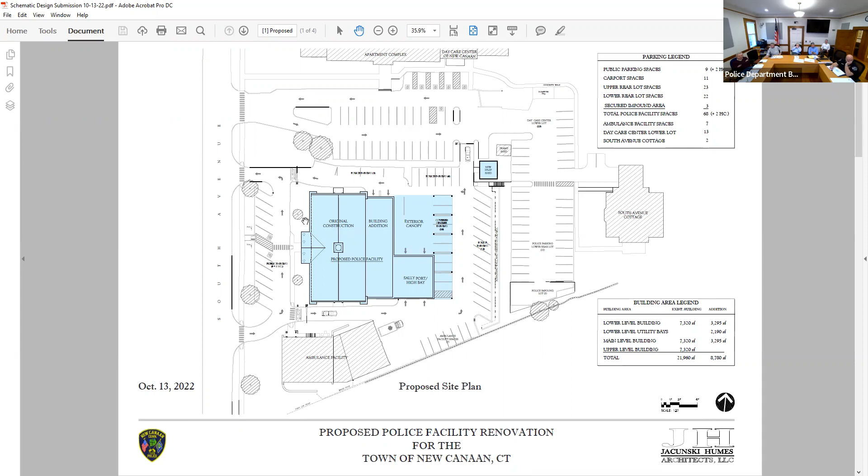I think we understand the visual of it, and we're going to work to minimize it. So Brian, if you lower it, does it create any risk with water infiltration? Because you'd want it most when we might have a water event. No, we can still I guess that would just be the area.

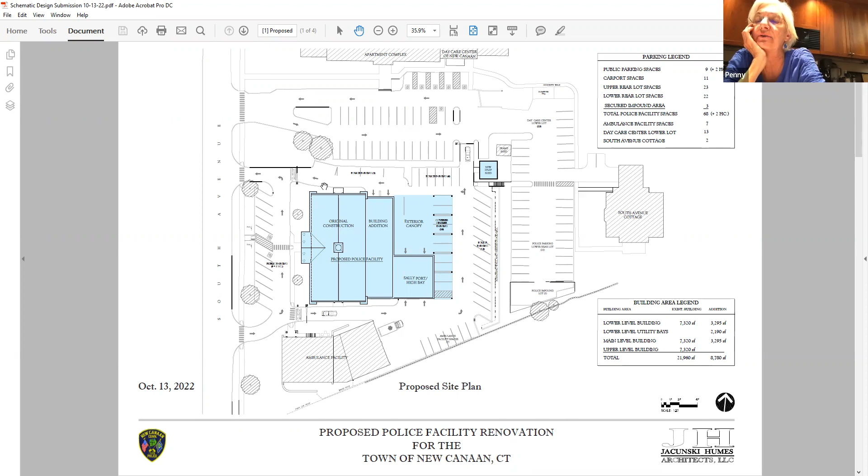Say if it's possible to rotate it around the building, no matter how nice you can make it look in the front, I'd like to know how much more it would cost us to do that, or if it's even possible. Now, the other location would be in this new island.

And that, we couldn't lower it at that location. We could just screen it. But lowering it here, as the grade drops around the corner, we wouldn't have a problem with drainage to pick up drainage from that.

So noted. My concern is with security of it, and that it's just sitting out there in the wide open. That's all.

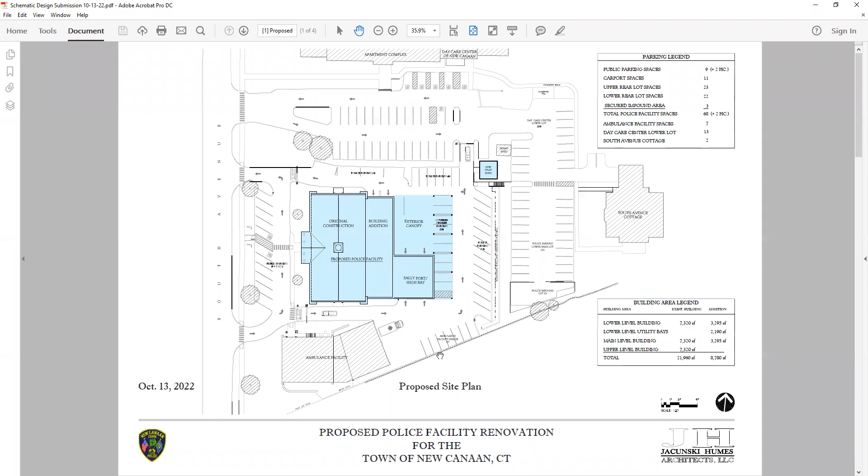As far as square footage, the chart on the lower right is the square footage compared to what we're at now. The only number that's changed is the 2190 for the utility bays. The earlier plans had that at about 1900, so there's a couple hundred square feet difference. That's the only change, and I don't see that as a real budget differential. A couple hundred square feet on a bay - those bays are not your high dollar per square foot areas.

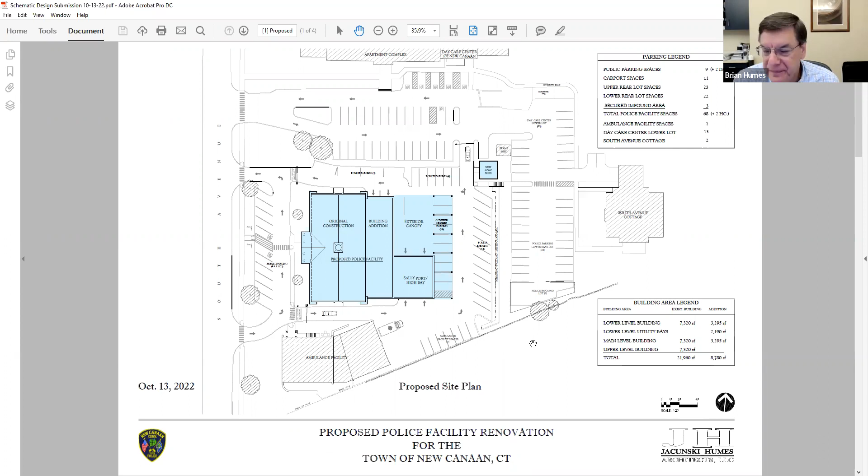So we've reduced the number of spaces in the carport, but the area of the carport is pretty much the same. We'll jump into the lower level now.

Why don't we start at that same Sallyport utility bay arrangement? That's where we've gained a couple hundred square feet, but we've actually made these double deep for 2 vehicle depth. The last one we had was 3 bays wide, all single depth, so we could accommodate 3 vehicles or bays of that size. Now we can accommodate up to 4 vehicles. And we've labeled these as utility bays, but in essence, they could all be a Sallyport.

We have wire mesh separating left and right, and a security screen at this location separating north and south. So it gives the police department flexibility on whether they want to store something in a bay, use one as a drive-in back-out bay and secure it for a forensics hold, or maintain 2 bays as a Sallyport.

What the police department's benefit is to a double deep Sallyport is not just that you can put 2 vehicles in there at once, but you can put a longer vehicle or an ambulance into that bay and have the distance to pull the stretcher off the back. A lot of times transport may involve medical transport, so having the capability of bringing a longer vehicle or ambulance in, getting the stretcher out the back, and then transporting is a benefit over a single deep Sallyport.

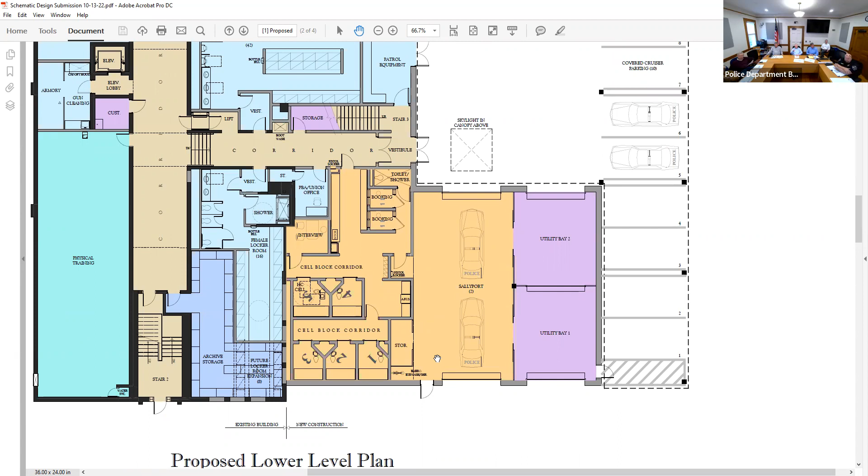So the maintenance vehicle space is where the emergency generator could go. Put the maintenance vehicle someplace else. You have those spaces 1, 2, 3, 4. If you want to really get the emergency generator out of the way, that would be a good place for it.

What is a maintenance vehicle? A truck that the guy goes around and puts it up. Oh, yeah, but no problem, it'd be undercover. That's, you don't want... Well, we might make it a natural gas generator rather than a diesel generator, so they don't have to store fuel.

I just put a generator at my house and it had to be more than 10 feet away from the property lines, 10 feet from the house, 10 feet from walls. Currently it's right next to the building, so as far as 10 feet goes. But it's natural gas, so it's not a problem expelling it, it could float. Yeah, all right.

We have 2 more bays up here, but these are lower height doors. They're going to utilize 1 bay for bulk evidence and found property, and the second bay could support maintenance, with the vehicle covered and storage inside. So that's the tweaking we did over the last couple months, identifying further where bulk evidence goes and where found property goes.

We knew we had to satisfy it. Now we had to lock it down and say, how are we going to satisfy it?

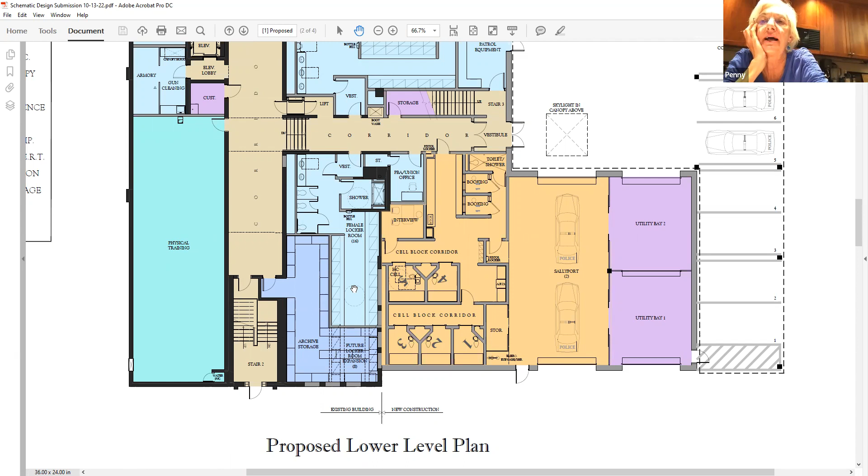How does the math work? There's only 1 shower. Yes, so even if you expand it out to 24, don't you need more than 1 shower? Well, the plumbing code doesn't say how many you need per, but we're showing 1 per 15 seems to be the adequate number for showers.

That kind of relates to what we're doing over here with this. Right, but if you expand to 24, and if you think eventually it might be a 50-50 force, wouldn't you need 2 showers? Just seems to me that's not quite enough for potential future space. And changing the shower would be hard.

It would be difficult. Depending on whether you had any room upstairs, could the PBA union office move upstairs someplace in that event? Yes, yes. Can't we just add another shower and extend it? If you think you only need 16, you could add another shower now.

Or just move that wall further down a little bit more. Or another shower could be part of the expansion. But is the plumbing there? We could provide it. I don't know, I just think we don't know where police forces are gonna go.

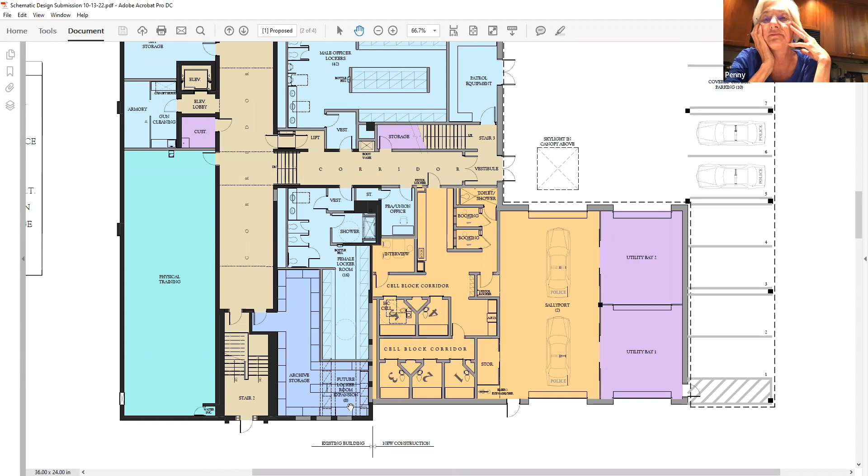You hear about how female policing is really helpful. I just think we'd look really dumb if we weren't well prepared. How many female police officers do we have now? 7? 6. We have 6 now.

We put in, what is this, 14? We put in 16, we're at 6 now. I'm sorry, how many do we have now? We're at 6. We built it out for 16, and any building construction project would say 1 shower per 15 people. Suggestion: we solve this by putting the plumbing in the build-out area for 1 more shower.

Just plug it, pre-plumb it, and not use it. Yeah, easy to put the plumbing in now, hard to do it later. Remember, all gray walls can be moved. Black walls can't, on the schematic. If in 20 years we have more than 16 female police officers, certainly the archive storage wall can be moved. There are other ways that they can expand the ladies'.

Just plumb out the PBA union office. Yeah, yeah, so it can be done.

So Brian, I guess it's one for 15, but don't you ever have a need to have two people do it at once because it's so busy, or there's an emergency? No, those are spread over 3 shifts too, so not all at the same time.

Sure. Are those showers, is that an ADA shower? Is that why it's so enormous? The one, it is, Penny. We need to provide for accessibility into the showers, ADA accessibility for police officers who probably can't do their job if they're not mobile.

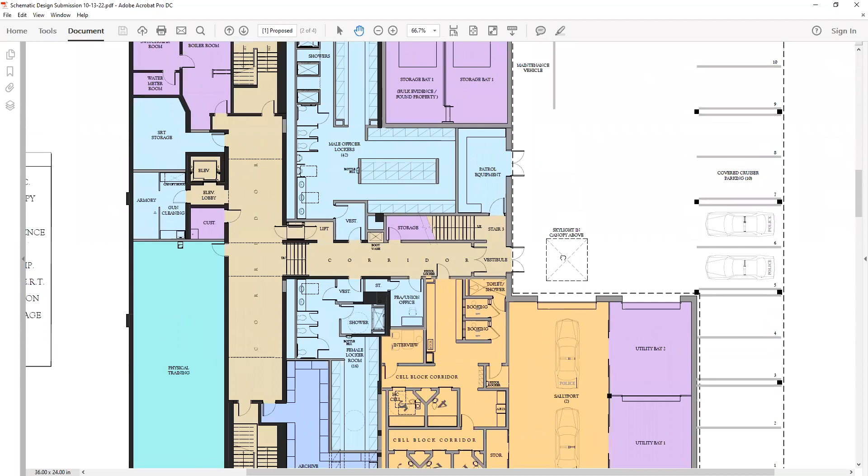I'm sorry, so what's the size of our current force? I should know - 47.

Tom, you had a question about the maintenance vehicle and the storage bay. Is the anticipation of usage that the maintenance vehicle would be accessing things in the storage bay when it goes out at the cones or whatever? Is that what's gonna be in there? Yes. So why wouldn't you put a doorway between storage bay 1 and the garage, so they wouldn't have to go out in the street and open the doors up there? My worry is if they put the truck out there and they're partially blocking the egress that the rigs are along. Put a door right there with a hand - can you do that? There is one, it's just not on the schematic, that's why I'm asking. It makes sense to have one there so you could just load the truck up while it's sitting without having to go outside and go around, or having the truck block the way. Can we do that, Brian? Yeah, good point. I think there is one in the current construction, on the side of the trail. That's a good suggestion.

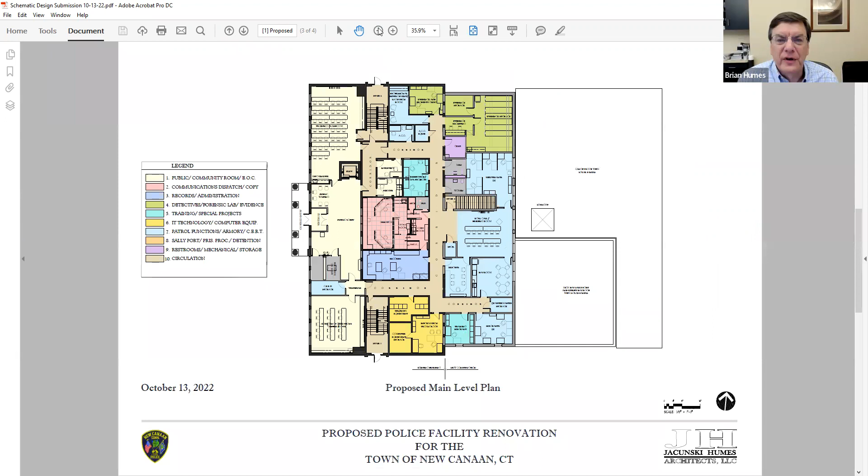Main floor. With the main floor, you might look at this and say nothing's changed. Again, that's probably a good reaction because it does really function well. The public space is still identified in yellow on the left side.

Training classroom - Brian, before we move on, just on the physical training room, what's the ceiling height projected to be there? Are we gonna get 12-foot ceilings in there? No, you're gonna get 8-foot ceilings in there. Eight, in a training room? 8-foot ceilings in the physical training room. Is that adequate? It is.

Most of this, John? Anybody else? I think it's the best we can get there. I think, Brian correct me, you're gonna leave the ceiling open, yes. So we think it'll work, and I think that's the best they can do, given the confines of the current building. It will support hanging bags, it will support things loaded onto that floor ceiling assembly. A lot of the physical training happens now on multi-function stations, and it's high enough for that function. Someone that's 6'2", 6'3", running on a treadmill will be able to do that comfortably.

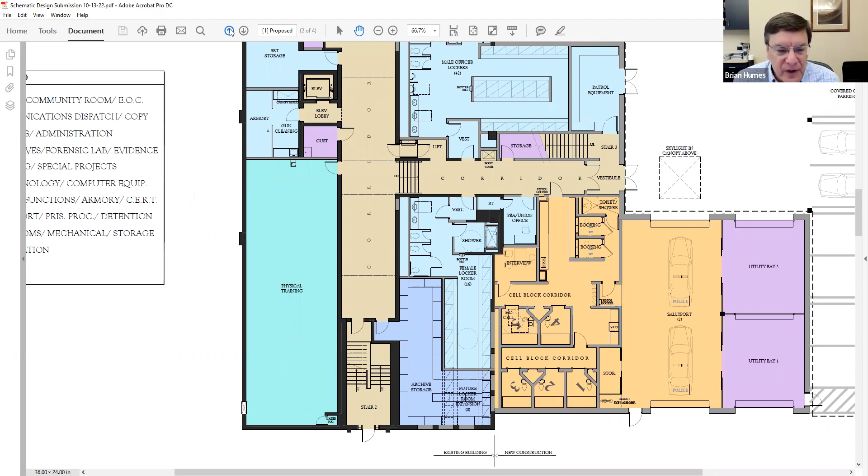I can give them plenty of examples of 8-foot police department training facilities that are adequate. I tell you what, I'd like to see one. Myself, I just don't buy it, but okay.

Well, what's the alternative? We're not gonna dig down. I can't let people in - we spent a couple hundred thousand dollars and the training facility goes from 8 foot to 9 foot. That's a tough thing to look at people in the eye with.

Is there really an alternative? I think 8 is good, you should go look at one, but I think 8 is more than enough. I don't think it's more than enough, but that's kind of what we're stuck with, right? We would love 9, we'd prefer 10, but it's what we're confined to. Yeah, it's not great, but it is.

What's the height, and how many people do you have in the workout facility, the physical training room, at any one time? Just from the few tours I did, it always seemed to be a low number, so you'd like to have a higher ceiling if 8 feet works. I don't think that space is going to get really crowded because you don't get a ton of people in there at once, right? It's spread out, it's over shifts. It's not the number of people, it's the ability to do proper exercises, like pull-ups, in an environment that allows for it.

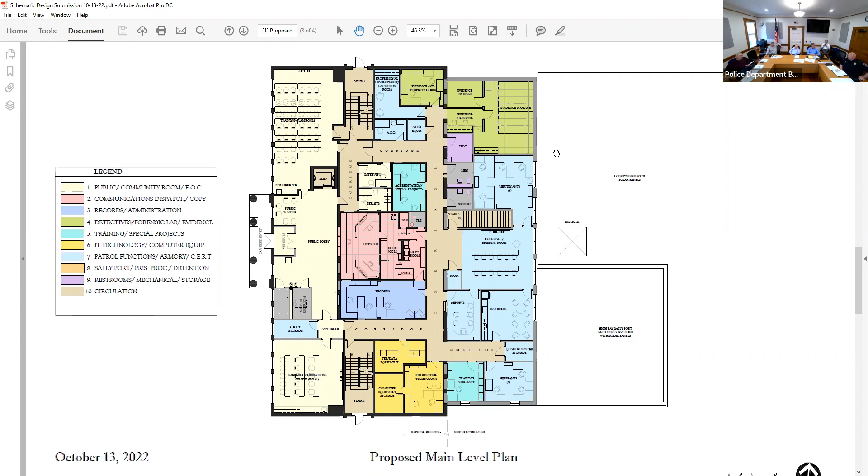What's the height of the locker rooms? 10 feet? Those are at a lower level. Height of the locker rooms, Brian, just for perspective? Yeah, those are 9.5 feet. Is that high enough, Brian, to accommodate proper circulation through the lockers themselves? Yeah, the lockers have a certain height with the bench, and then 7-foot height. So we need space above the locker for proper ventilation out of the top of the locker. We do have to bring those ceiling heights higher, and we can accommodate the mechanical requirements for the lockers.

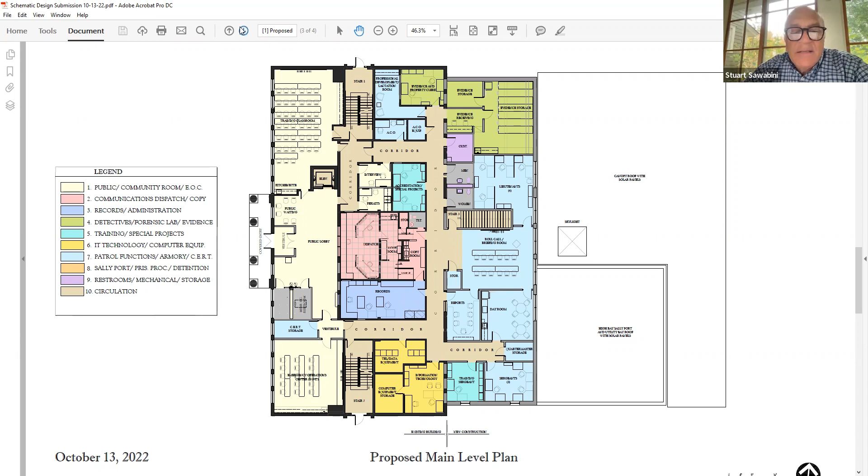John, going back to the physical training room - the dimension of that space, how does that compare to the one we currently have? Well, we're currently basically in the hallway right now, in the corridor. Yes, it's like 30-40% bigger, so it's gonna dramatically improve what we have now.

So you could just swap the female locker rooms with the training facility - is that high enough? Is it the female locker room? No, it's not high enough for lockers. This space at 8 feet is not high enough for the requirement for the lockers.

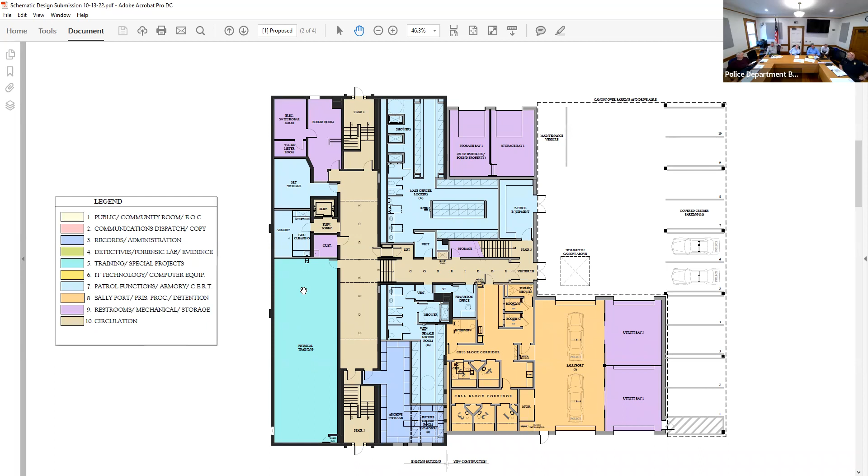That's also a major cost factor, because lowering the floor on the right side of that building, all the way down, versus keeping the floor level - both structurally and economically, a big difference. Don't want to do that.

Hey Jim, it's a little hard to hear you. This is how we add space to the ceiling for the locker rooms, because we have a floor elevation change between the upper corridor and the lower corridor. Everything on this lower corridor has an expanded ceiling height, which we need for the locker rooms to be able to exist in the basement. The only way is we're going to excavate out this floor area, up to this line, so we can get the proper height we need in the locker rooms. Anything to the left of this corridor is limited to 8-foot ceilings because of the current construction, but we're lowering the floors to allow higher ceiling heights for the locker rooms.

Doesn't the grade drop too from the front to the back anyway? We're getting rid of that - that's the scary part. No, not anymore. It's a major structural and cost factor. The way it's set up is clearly the most effective way - lowering the blue areas, the light blue areas, and keeping everything in the beige and darker areas at the current floor level. Both is better structurally and economically.

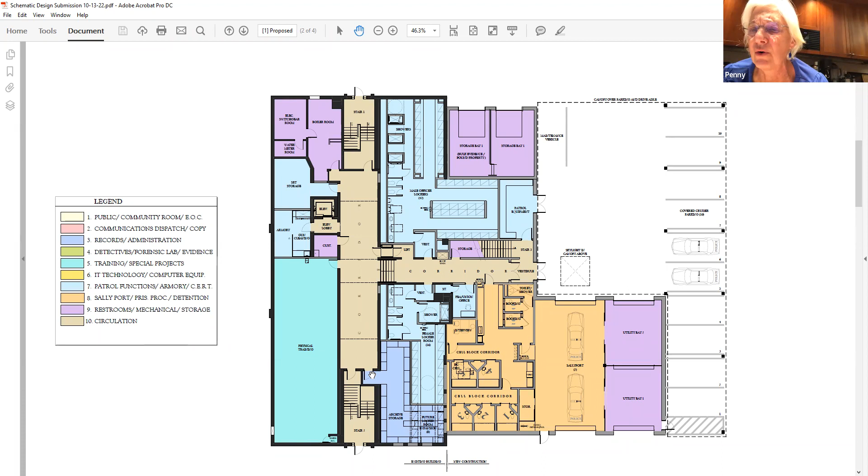One suggestion, Brian, that might address the point - it might be a good thing to do - is go ahead and excavate the whole area, and put a raised floor in the whole archive area, including the future locker area. That way, 10, 20 years from now, if something needs to be changed, there's an opportunity. Jim was proposing to excavate everything, down to the same level as the locker room, and then putting a raised floor in, so you have level access from the hallway for the archive storage - in other words, doing exactly what Brian suggested for the locker room expansion, but for the whole archive area. That way, if you do something later on, there are many more options available.

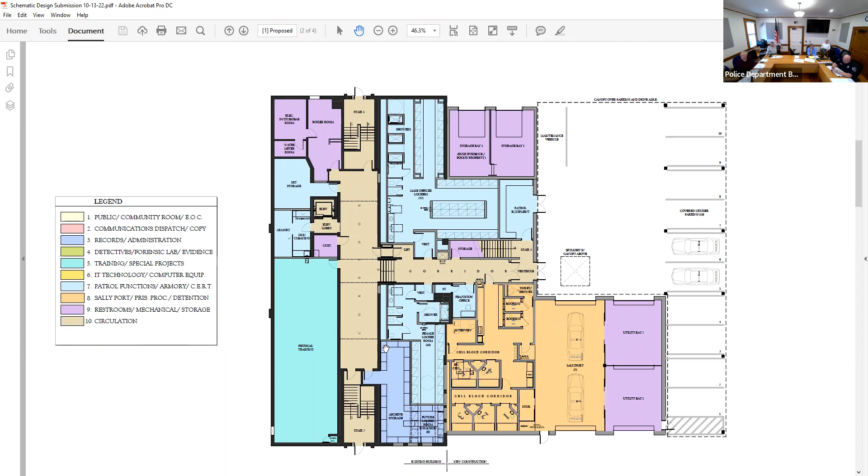We can look at that structurally. Okay, let's take a look at it. I think that would be a good idea for an alternate, because I think you're going to find it's quite expensive. Future - let's look at it. We're not going to ever do it in the future, that's it.

I think on this floor we've maintained the square footage, but we've just changed some room designations. I'll start in the green area at the top. We have evaluated storage capacity for evidence, and we've expanded some additional evidence storage to support the high density shelving. We've shifted the evidence and property clerk to this location, so we've expanded the area of evidence storage and evidence property clerk.

To the left of that, there was a bunk room. We've redesignated that bunk room to a professional development room. A secondary use of that room would be a lactation room, which needs to provide a quiet, windowless space, a space where you could secure the door for the purposes of lactation. So that's a double purpose kind of professional development library.

Animal control is still in the current location, but we've taken accreditation and special projects and moved them to this office space.

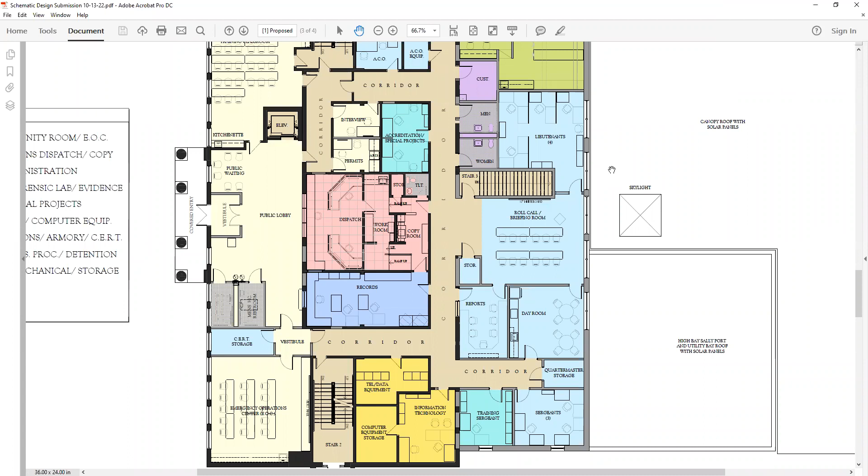So Brian, we don't have any bunk room now - does that work for everybody, not having a bunk room? There is no designated bunk room. There are emergency spaces that they could utilize for bunks, but they didn't want to designate that as its only use. I mean, there's a lot of space if you need to bunk down, as long as they have the stuff to bunk with.

Brian, go ahead. I just have a question.

The ACO room is currently the Emergency Management, Emergency Operations Center closet, which we're losing. In my discussion with Kevin, or correctly with Leon, we were in support of that.

I just want to voice to this committee that in that room right now is all the CERT jackets, but more importantly, about 13 telephones, 8 or so computer workstations, and all the keyboards and requisite equipment we use for all the specific positions for each department head when we use the EOC. So when we get later into this process, those things would either need to be permanently located in the EOC space or housed so they are not broken when brought in and out, which is what happens right now.

We wheel out a cart with all the servers and printers and Wi-Fi and hook everything up, and we always break one or two in the process. Since we're losing that space entirely, it will have to reside permanently in the new emergency operations center location. So I'm bringing that to the committee's attention.

We're okay with losing the room as long as the stuff eventually moved into that space is done appropriately, so we're not having to-- basically we have nowhere else to store it. The storage is built into your emergency operations room and the CERT storage room, so you're not losing space, you're getting it attributed back into the operations room and the CERT storage room.

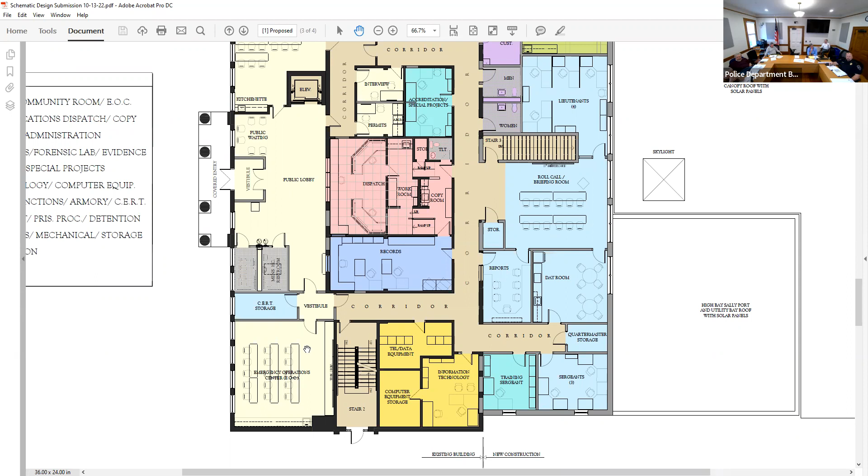Now, I don't want the purpose to be a training room, because obviously you only stand up the EOC, God hope, only a couple times a year, so it can go away. There are clever ways to have it either in a desk where you pull out the phone and the computer as they're available. But you want to put that into consideration, we're losing that real estate.

When it comes to actually furnishing the thing later on, in those discussions, we're not gonna skip on the cabinetry and storage in that room.

So when we move there, we want to make sure we have the wiring necessary in that upstairs training room at the top. That's actually a benefit.

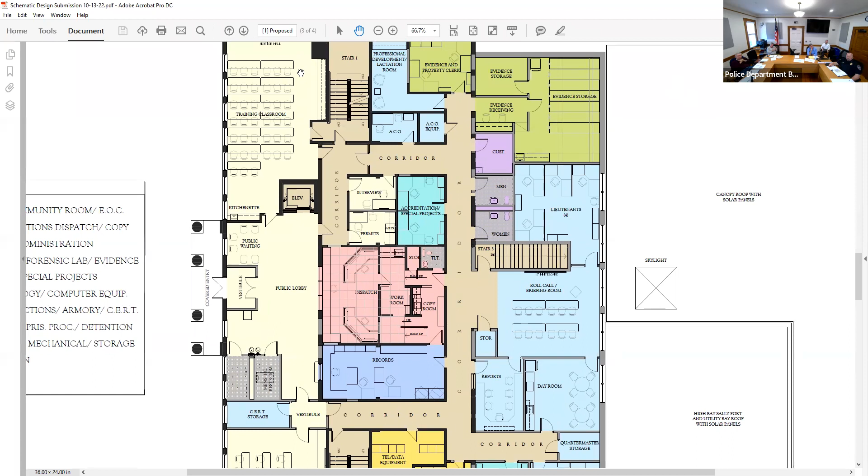So I'm assuming, Russ, you and Brian have already sat and gone through all the requirements of the EOC, or no? No, we've not had an in-depth discussion. All I've seen are these preliminary renderings, basically saying here's the space that's available. But we've not had any discussion with the committee or its representatives on the details of our requirements. But you have, Leon. I have very briefly with Leon, but again we didn't go through actual requirements documents or anything like that-- it was just, here's the space we're going to have.

So we would encourage it, we would like to have those conversations. And those conversations will happen. We need to bring our consultants on board to assist in those conversations.

But for storage, we're showing base cabinet storage in the front of the EOC, and we're also showing base cabinets and upper cabinets to the side of the EOC. So all of this is for storage within the room. And we've moved the CERT storage to adjacent to the Emergency Operations Center for the purpose of any other equipment needing to support the EOC.

The CERT storage did have a space that was up in the training classroom. It was smaller, it's where this kitchenette's located. You can see the size of that small room has now been expanded to increase the amount of storage and put it in close proximity to the EOC.

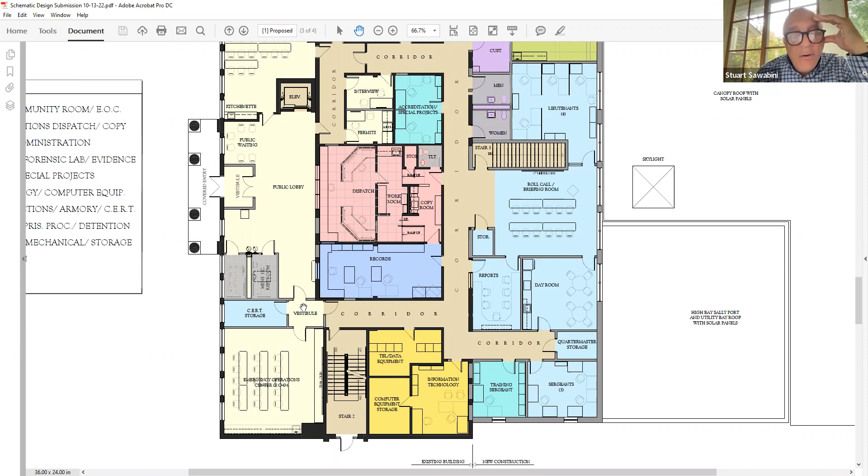The other concern I have is when we lay out the Emergency Operations Center currently, we lay out 17 desktop locations and 4 help desk locations. And I'm seeing that you've got 15 locations currently. So this is going to take some additional input from the EOC to be sure we've got these spaces appropriately laid out.

Yeah, I think that's all good comments, and those are the conversations we need to have. It's schematic design—we just want to know that's a good location for the Emergency Operations Center. We can work with the space. We don't want in design development to say we don't want the space, or we're going to move it to another floor or another part of the building. If this is a space we're showing 15 and we need to get 17 or 18, we need to work on that in that location.

And then we can have further comments about how we want electrical in the floor, in the walls, overhead, wireless access points—all that electrical requirements. That's what we are anticipating in design development, so we'll blow up all of these rooms in greater detail to get all the specifics for everybody's needs within the space.

And as Russ pointed out a few minutes ago, this is a much better arrangement than they have now, because now they just have the training room. So now they've got the combination of the training room and the EOC center, so maybe rethink some of the things. I think we can work with it, and I think it's actually an improvement. We're excited to have more detailed conversations about how to leverage it.

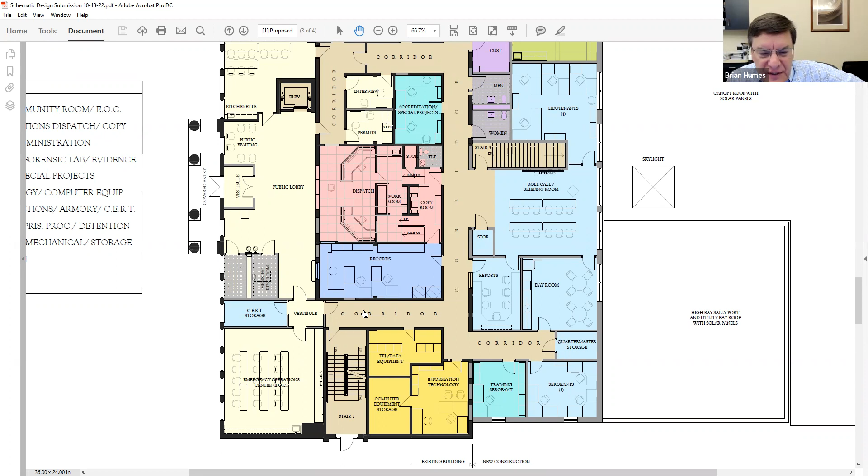Even this little vestibule is important—while we have a little space with 4 doors off of it, this is very important for security. So we need to determine the level of access and security requirements for each of these doors. We could have circulation going this way that's access controlled, and circulation going this way that's also access controlled. That's the next level of discussion we need to have. But having this vestibule with access control is only going to make this space better, not just directly off the lobby.

Brian, when do you think that would happen—2 months, 3 months from now? When do you want to start that process? I would say it's in November—next month, yeah.

Make sure—what's the size of that room, Brian, the EOC room? If you have it, if not don't worry about it, I'm just curious. It's smaller than the room right now, but I can get you that. We can use it more efficiently, and we're also getting the phone bank out of there, so we can make it work.

The devil will be in the details, because my thinking is that room is going to be empty 90% of the time, but when it's full, it's going to be really full. You're going to have 15, 17 people in there, so you're going to need enhanced HVAC, I would think, among other things, especially in the summer, to make sure that room can accommodate that many people.

But they now have a secondary room to put some of the functions that were crammed into the EOC before—they've got the whole training room available too. Right, but I'm just thinking that room's full of people. Okay, we just have to think that through. They can reassess it now that they couldn't before.

I've been sitting in on the meetings with the architect, Ryan, and the police department. I would say the police department has done an amazing job of making sure all interested parties get what they need out of this building. You guys are absolutely right to make sure that where the rubber meets the road, next month, all these incremental fine points are dealt with. It's the way the process is supposed to work.

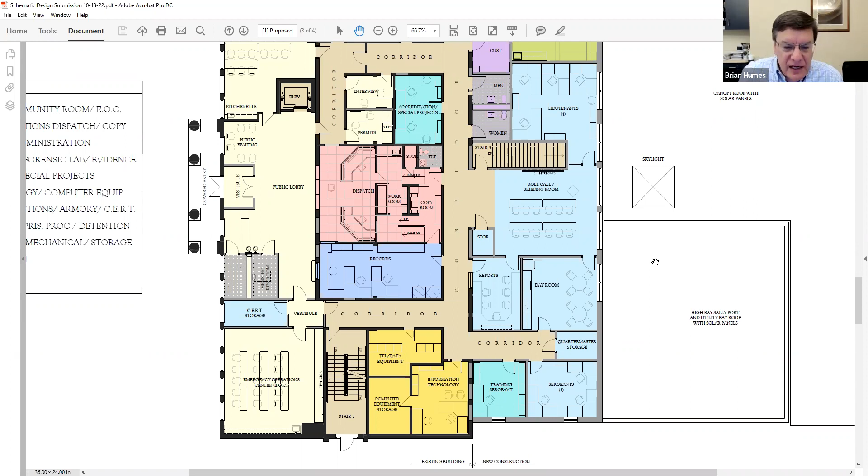So what will be the uses of that room when we don't have an emergency going on? That's a good point, Penny. That room does have use at all times of day and night. If it's not an EOC, it supports any other training, small training requirements, or any other meeting space the police department needs. It would be under their use and control if it's not an EOC. So it's a plus.

Speaking of the public lobby, it's about the same size. It's just going to be modernized a little bit, with new handicapped accessible restrooms, but the dimensions are similar.

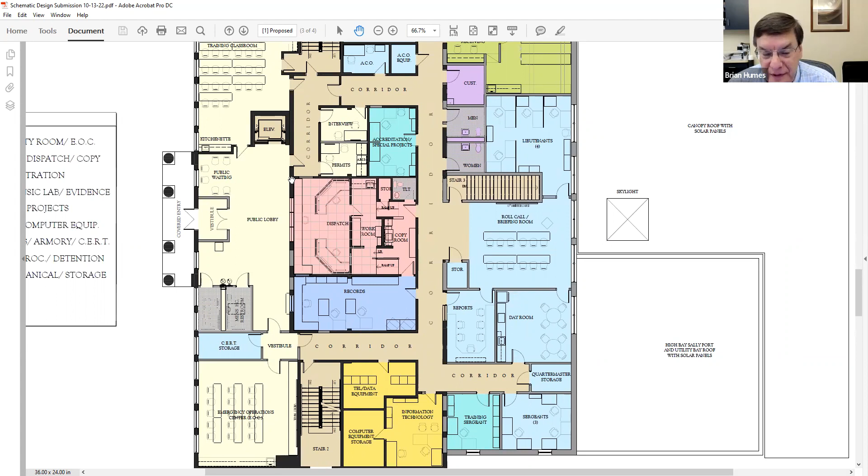Thank you. Brian, I'm assuming the dispatch area in red is going to remain the way it is for the most part. Do you see any changes there? Yeah, there's been talk about refreshing some things in that space for finishes and improvements. We're going to do what we need to do to make improvements, but the configuration isn't really changing. Okay, so the walls aren't changing. Right, just putting new clothes on it.

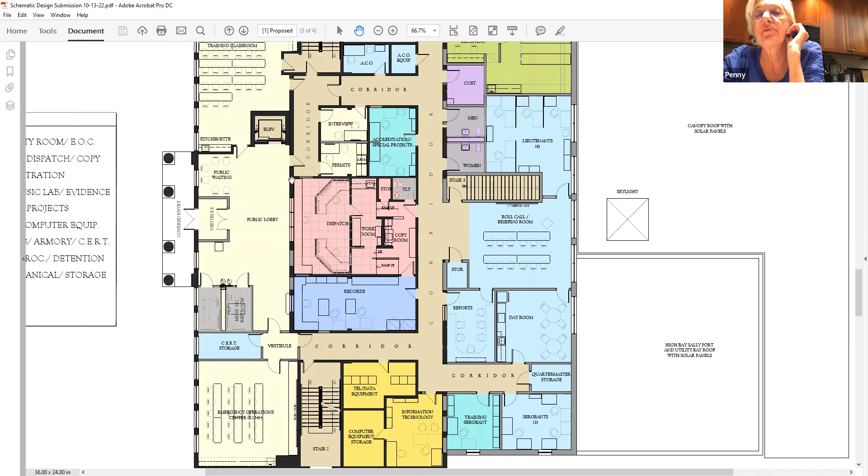Can someone explain to me, in case I get asked, why we need a training classroom and a separate emergency operations center? Are you going to have training going on during the EOC? The EOC can be a general classroom when it's not being used as EOC, is my understanding. Right, but why do we need a separate training classroom then?

Because you wouldn't necessarily be having training going on while you're having EOC operations going on. As Russ just mentioned, when there's an emergency going on, we have a large number of people and equipment that would spread through those two rooms. So in EOC operations, you'd have higher level leadership in the EOC room and your call takers in the training classroom with the 17 phones and computers. It gives us expansion, much better than now where we're crammed into the training classroom.

And when the emergency operations center is not in use, we use it as a small meeting room or smaller classroom. A lot of times our classroom is double booked, or we can't accommodate particular meetings because the room is being utilized for other things. So it gives us expansion to have a smaller meeting room when it's not used as an EOC center, to expand our usefulness. Right now the one meeting room is not adequate.

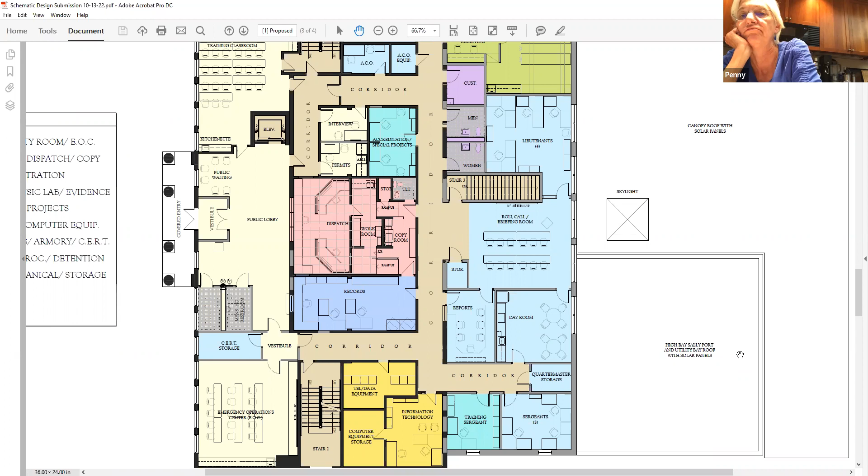So I'm just thinking, before we show this to the town bodies for final approval, we might want to label that room and give it a couple of uses, so it doesn't look like just a one-off room. Sure, it's a good suggestion. I think that's good for most of the multi-purpose rooms, to give them secondary uses.

The other room in question was the storage outside next to the Sally Port, and that has about 5 different uses. It would be good to have secondary, third uses labeled, so we don't have to work through these on paper.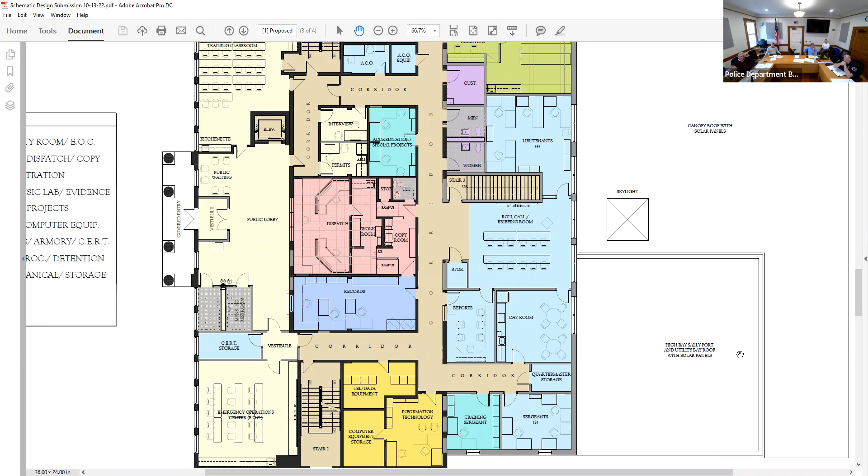You're ready to look upstairs? This is great because my lawn care guy is doing my hedges right outside my window now, so I hope you don't hear too much of it.

We've actually switched lieutenants from sergeants on this plan. So the sergeants are at the lower part of the plan, and the lieutenants are sharing offices at the top part of the plan. We've kind of right-sized the day room, reports, and roll call. So let me go upstairs.

All right, upstairs, same functions that we had before. Administrative is on the front side of the building, from front to back. We still have video simulation and defensive tactics, but we've flip-flopped the rooms from earlier plans. We had storage here as archive storage, but we've taken the archive storage and brought it downstairs to the basement level. So this is now a general storage room.

Hey Brian, can I ask you, is it 100% that we're dedicating an entire room for this video simulation training? From the folks in the police department, do we know what the ongoing costs of this are? Because you have to buy the system, buy the software, train somebody. I'm assuming it evolves over time, and I don't know what the useful life of these are, but is that 100% in the plan?

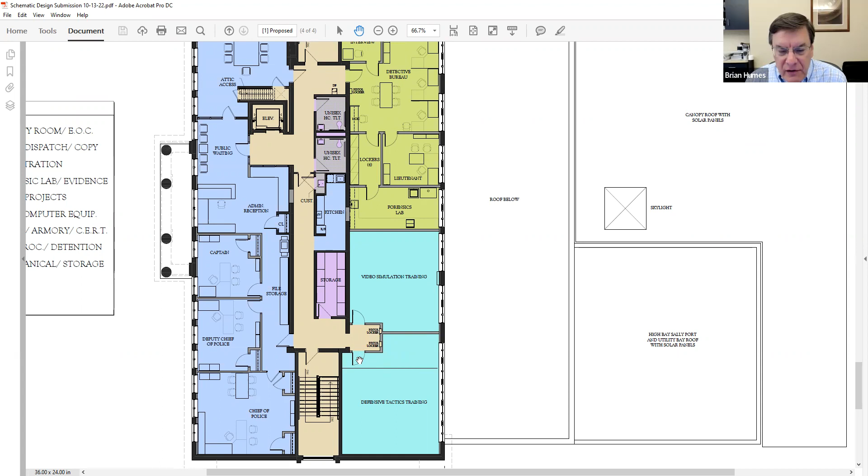Quick question, Tom? Brian, in the defensive tactics training room, right below the doors, there's a line there. What's that line denote? That line depicts different flooring. The area right inside the door is a hard surface floor, so anybody waiting or viewing would be on a hard surface floor. From the line down, the flooring is a mat, and the walls would have mat on them too.

So it's designed for mat use, with a cushioned mat for defensive tactics training. It's a different floor texture and surface there. Do you anticipate putting any storage space above that line, around the corner from the door? If you're going to have defensive tactics training, are you going to have equipment in there? We'd probably look to do that with furniture instead of built-in.

So Brian, on these two rooms, at one point when we were talking about them, they were set up so that they were flexible. I thought I remembered someone saying you could take down the wall between them if you needed to. I was wondering if you could talk about that, and also about what looks like the pistol lockers inside, that you have to secure your firearms before you actually go in for training. Right, these would be for officers' use before they come in. They could secure their firearms before they come in for training.

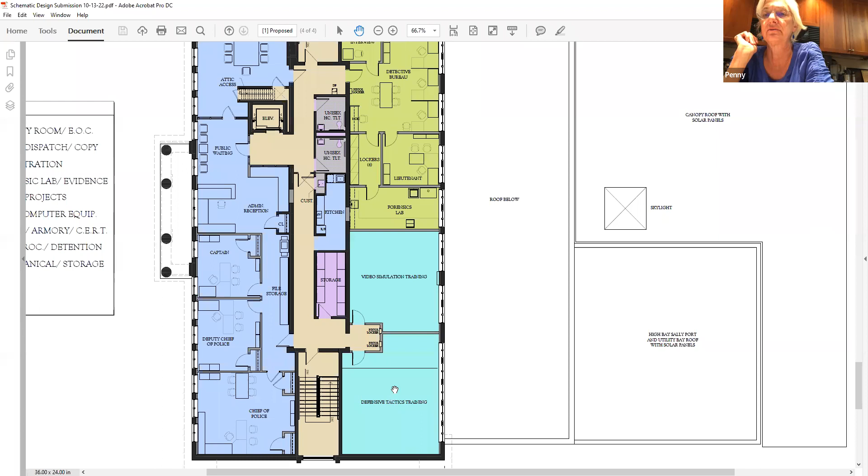No, I'm just wondering, it doesn't look like we're ever planning now on using those two rooms together. No, right now the defensive tactics training space, the reason why we flipped the designation on this space, is that they currently have mats up in this area of the building. So if you're ever up there and see the mats on the floor and on the walls, that's what they're currently using for defensive tactics training. The area in this location is hard surface, then they come onto the mat area. We wanted to duplicate the current dimensions of what they're currently using, so that's why this line and mat area is similar to the existing use now.

The hard surface flooring is helpful if you're not on the mat, to stand here and view. The video simulation is just a room, it has very little on the walls at all, and would typically be a separate space, not commingled with the defensive tactics area.

But everything in here with gray walls are walls we're providing. Anything with a black wall is a wall that's currently existing. So on this floor, the kitchen, the bathrooms, and this storage room are all existing spaces. But anything that's a gray wall is something we're going in and supplementing on that floor.

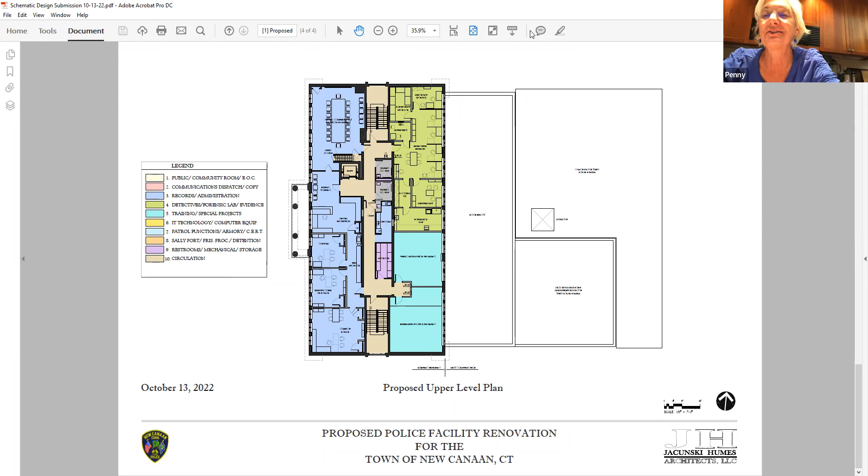Yes, okay. And then I just want to ask, because it looks a little big and I think we might get questions again—can you talk about the size of the police chief's office? Nothing personal here, Leon, it's just, you know. He's not here, we can talk all about it.

If you want to know the exact dimensions, I can get them.

Well, I just want to know—every time you read these articles, they talk about how you don't need as much space for executives as you used to. And I know there are confidentiality issues that the chief of police has, but I just wanted to get your opinion. So, Penny, I agree with you in terms of how it's incredible how small people's office spaces are. I think this is just a function of the fact we're using the existing building. And also, as a practical matter, the conference room is 100 feet away, so if you want to get 2 or 3 people together and look at something with a conference table, I don't think this is an oversized office. I don't think we have a problem defending that. That's 15 by 24.

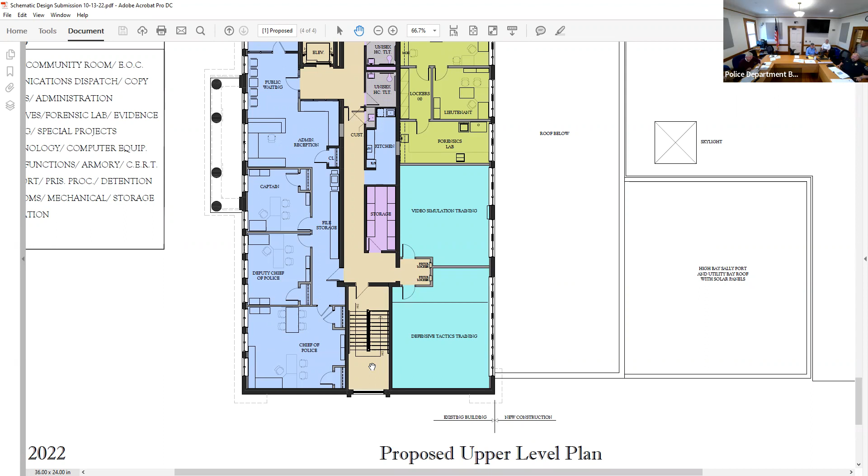Well, I think Penny is talking about the conference room at the top of the floor plan, aren't you, Penny? No, I'm talking about the chief's office. Actually, I was talking about the chief's office, but yeah, I'd like to hear about the conference room up there too. I mean, I would tell you, these are way bigger than the offices people have in the city now. People are in closets in places.

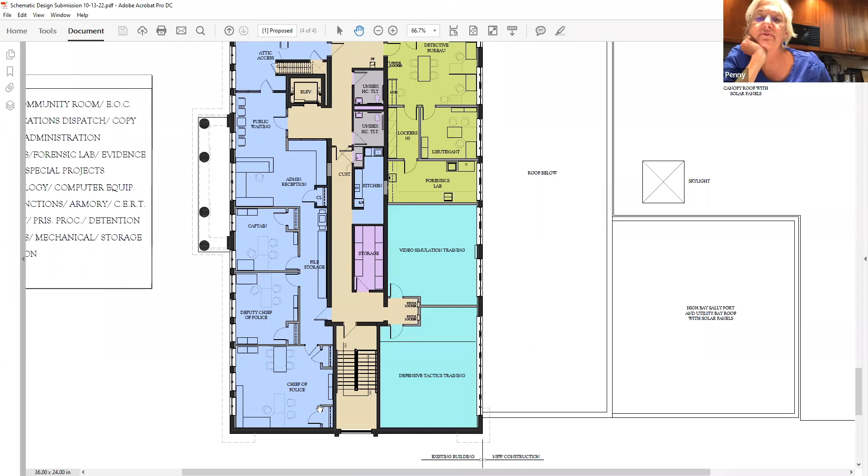I think he would want the building to have a small conference room in his area. We do have a need for that. You need to come up with—I wouldn't see a problem with this. A small meeting, it's gonna get into the weeds. If we were starting a new building with square footage, that'd be one thing, but the reality is we don't work virtually, we work real life. And this, as Amy pointed out, this is the space we've got. So it's not seeking an extravagance, it's just what's there.

And it's a good place for the chief's office. I mean, the chief's office is there right now, right? We don't have to move walls or anything—we're just on a different floor. Oh, it's upstairs now, it's moving out. Okay, okay. And the police have looked at this for 6 weeks.

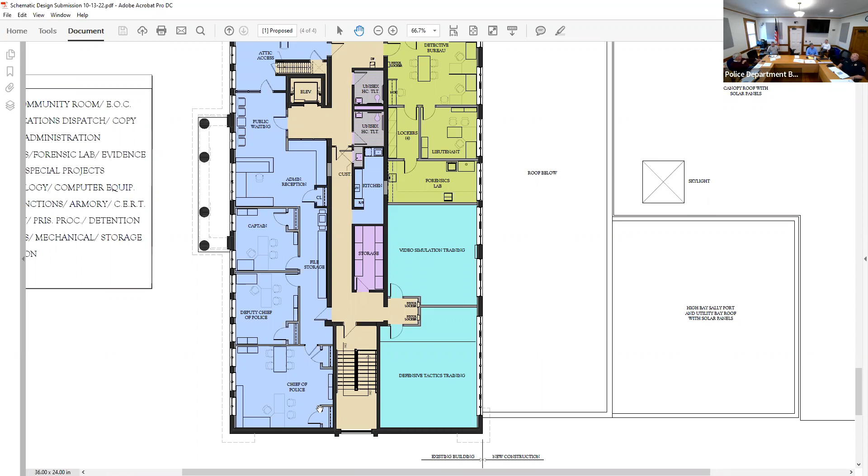They tried to establish what they think is efficient use of their space, and they made lots of compromises on officers' spaces and things like that. Again, it's the wall - we're not changing the size of the building, the size is what it is, this is the building that exists. This is where personnel will be, so in 15 years if there's a change, these walls can be moved, but for now it is what it is. The reality is these officers are in every day, 5 days or more a week.

As opposed to the city, where you're coming in 2, 3 or fewer days a week sometimes, so you don't need that space. But they did that before COVID - people will say, hey, this is the size of my office as an executive. The point is that what we did here is we worked with the existing building for all the reasons we ended up here. And because of that, we have a lot of space.

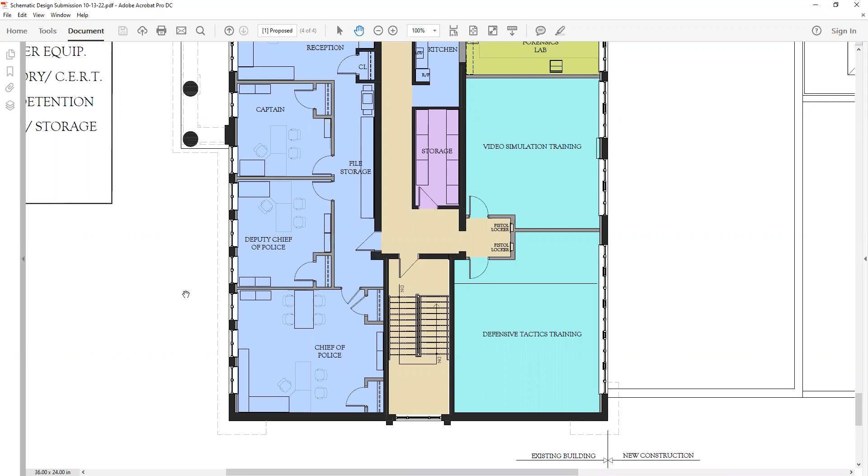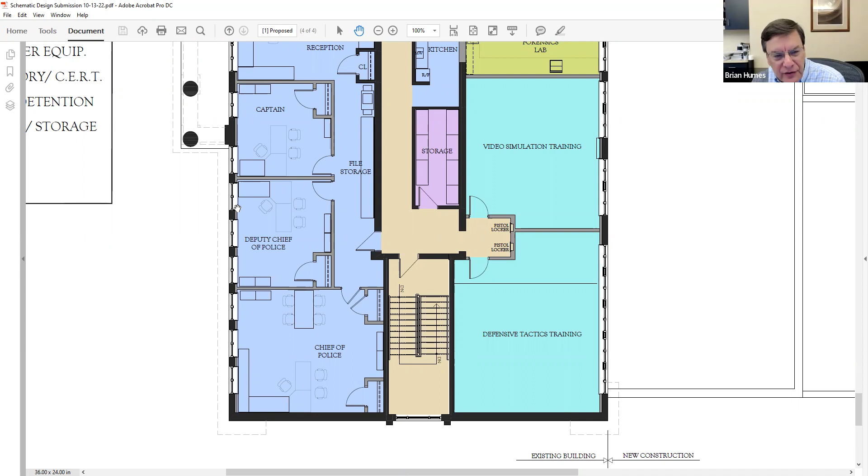The existing building does play a part of this because we have to make sure we're coming in between windows and not separating the windows from the spaces. This splits the window, and this happens to be 19 by 20 - this is an existing dimension, and we're using the windows as a dividing line for these offices. I think it works for the function, but I also want to point out that there's a gray line that runs along the exterior wall - we're furring out all of the exterior walls.

We're furring those out for 2 reasons: we can run new electrical through the new partitions if we're furring those out. Furring means we're providing a new wall against the existing wall. So we're going to insulate that space, run electrical in that space, and run new wiring for technology within that space, so we don't have to get into the existing walls. So we are going to be padding those out and adding insulation.

That means those walls will move inboard, making the rooms just slightly smaller, but making the building construction much simpler. And we're adding R-value to these, and the new windows will have better R-value also.

Understanding this top floor was renovated within the last 15 years or thereabouts, would we not have already done that furring, as you call it? No, we didn't. Any reason why we wouldn't have done it then? Well, that was a directive to just provide space for town hall - it was just raw space that we provided. We did provide separation in the corridors, bathrooms and kitchens, but we didn't go to that level. It wasn't very renovated, well - it was just a quick added-in space, just an economic thing.

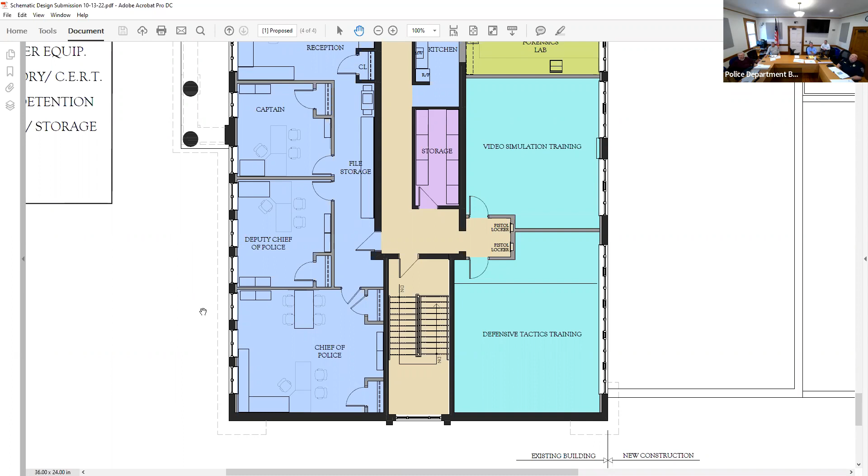They didn't replace the windows, which should have been replaced and so on, so it was a temporary move - the windows were not touched, the exterior wall was not touched.

Can you talk about the kinds of meetings that'll happen in the conference room on this floor as well? Yes, this administrative conference room is actually given two names. Administrative conference would be one, if you have anybody coming to meet with the department or meet with the chief. You can get on the elevator, the public could get off on this floor, and then you'd be limited in circulation to only this area of the corridor. So there'd be access control here and here - the public would have access to restrooms if you're having a meeting, access to the elevator, and access to the stairs for any emergency egress requirements from this floor. So you can bring outside agencies or the public up to this space if you want to have a meeting.

The other use is tactical planning, which works with the Detective Bureau right across the corridor - this is why we have this door to bring the detectives in here. Tactical planning for detectives involves planning for any activities that the Detective Bureau or the department wants to organize.

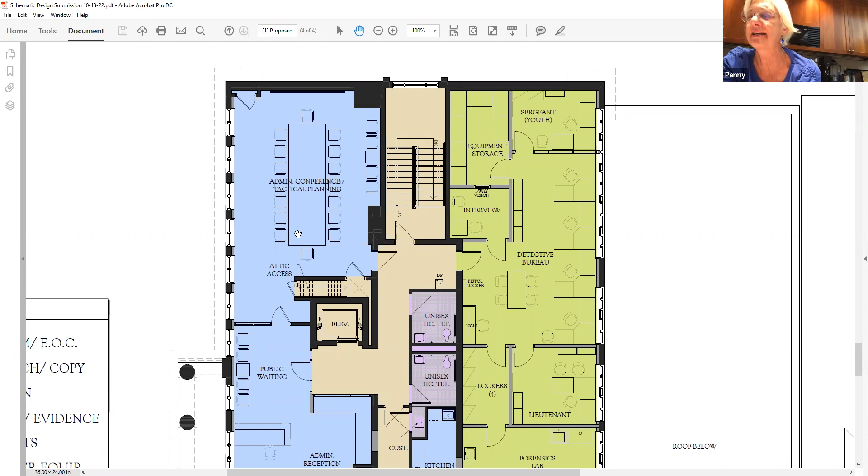Yeah, you captured it well, Brian. Can you talk about the attic access? I remember that being sort of squirrely. From my one tour, are we making it better? Isn't that to get up to communications equipment or something? We are going to make it better by trying to relocate that communications equipment down, so you don't have to access upstairs to get to that.

But the ship's ladder is going to remain your only access to the attic space. We're going to move the equipment up there to an offsite location, a better location to service it. That was my question—the committee should pay careful attention to the public safety radio backbone and switches, which need to be climate controlled. As we move forward, where that gets located deserves special consideration.

I thought we were just moving into Stuart's house—isn't that what we're doing? I'd like to be part of that discussion. We're paying for it, that's under our department. I'd love to be part of that discussion too. Brian, I'm assuming when you go into design development and bring in consultants, Northeast Communications, Norcom, will be one of those. Yes, they're not a consultant under our contract, but a consultant of the owner, the town, so we will include them, Stuart, in our conversations.

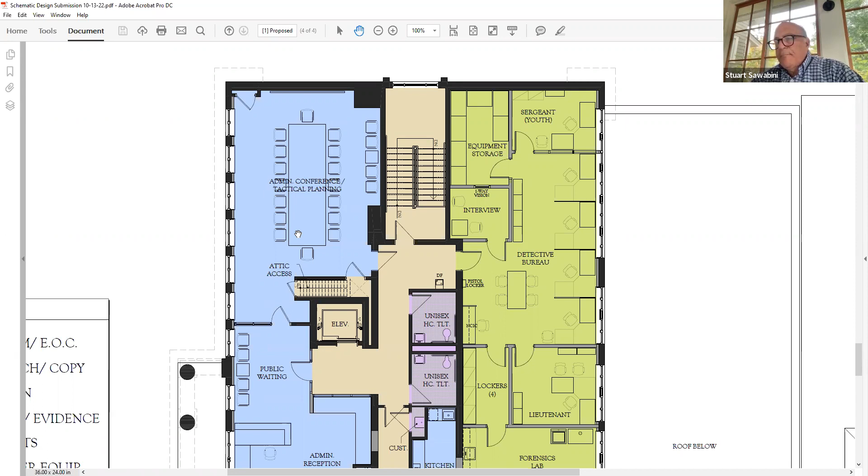Okay, I apologize, I have to jump off. I'll call somebody to get filled in if I missed anything, okay?

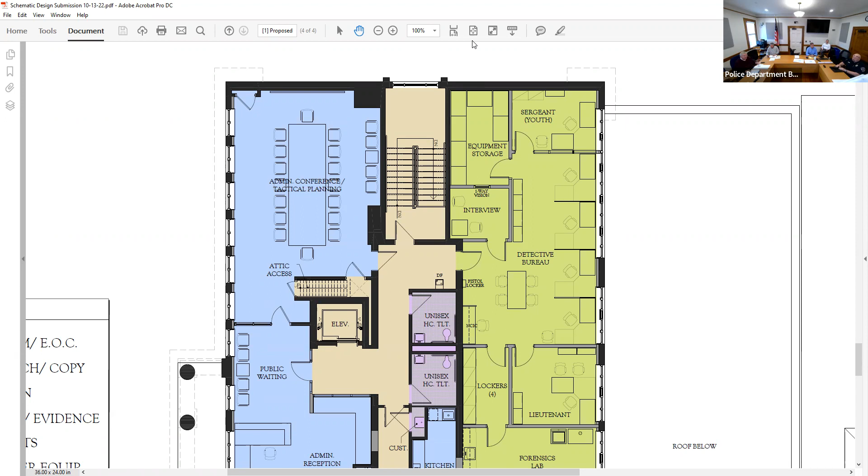If you don't mind, let's take a vote—I don't know if we had an actual vote on the agenda, but certainly a sense of the building committee to approve the schematics going forward. Is that something you guys are willing to do while you're here? Subject to moving forward, subject to changes, subject to all the follow-up that's going to be done in design development. Jim, why don't you make that motion?

I move that we plan to proceed into design development with all the caveats we've discussed previously. I'll second that. All those in favor? Aye. Any opposed? All right, thank you, Jim. Thank you, Ames, bye guys.

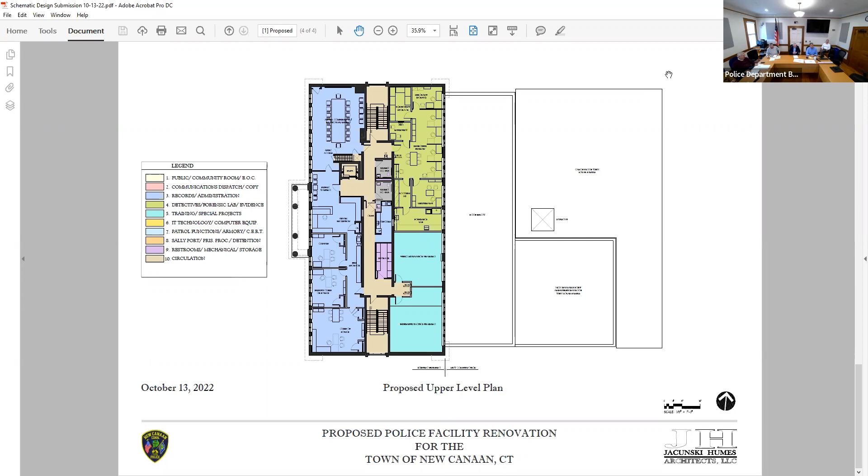All right, where were we? Any other questions for John? I think everybody pretty much asked the questions. Anything else needs to be open? Anything else on the schematics themselves? Actually, I've got to run to a 10 o'clock myself, so is there anything else you need from me?

So the one thing that deviates from the space needs assessment is the parking. I know we talked about that ad nauseam, but this plan does assume an off-site solution for overflow parking, and I just want everyone to be completely aware that this plan does not cover all the parking needs.

You say offsite—you're already across the road at the church. Well, into other parking lots around, it's all I can say is an off-site solution, because I don't know that the church, although it feels long-term... but if we're looking at this project for 50 years, we're consciously making a decision to have less parking than we thought we needed, because it can be handled off-site.

I think everybody pretty much bought into that. It's the best that we can do on the current site. Right, and I don't disagree with that.